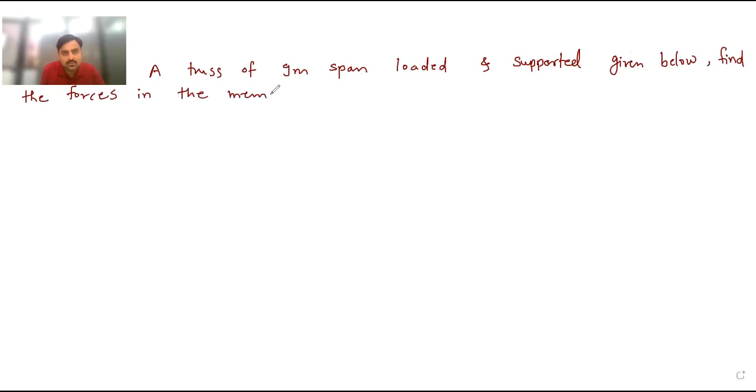Okay, so now moving further we will take the next numerical. So the next problem is a truss of 9-meter span, loaded and supported as given below. Find the forces in the members CD, DG and GH.

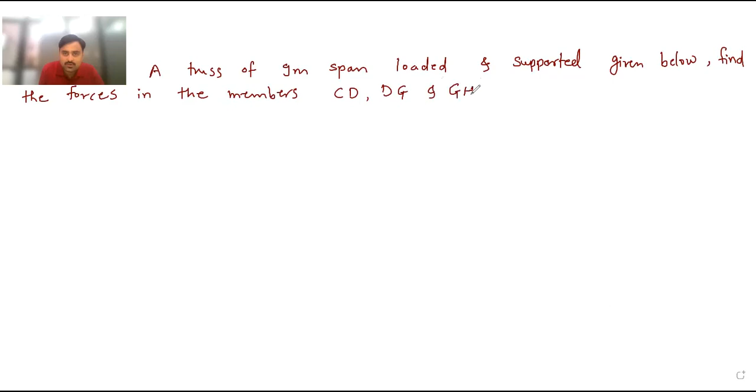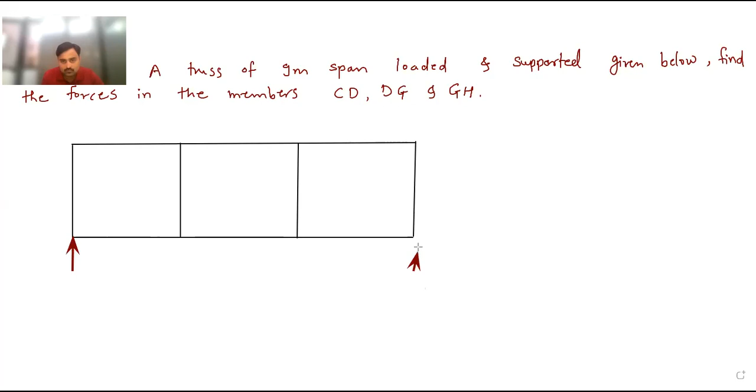Okay, so I will draw the diagram now. This type of truss is given: 1, 2, 3. Okay. So this type of truss is given and it is a simply supported truss. So I will show here the simple support. The truss is simply supported. So only the simple supports are given over here.

Now, the length is given. Okay, so forces are acting on the truss. Those forces are 9 kilonewton over here. Here at this point, a force of 9 kilonewton is acting. Here a force of 12 kilonewton is acting at this point. Then, okay, only two forces are there. So here it is the 9 kilonewton and here it is 12 kilonewton.

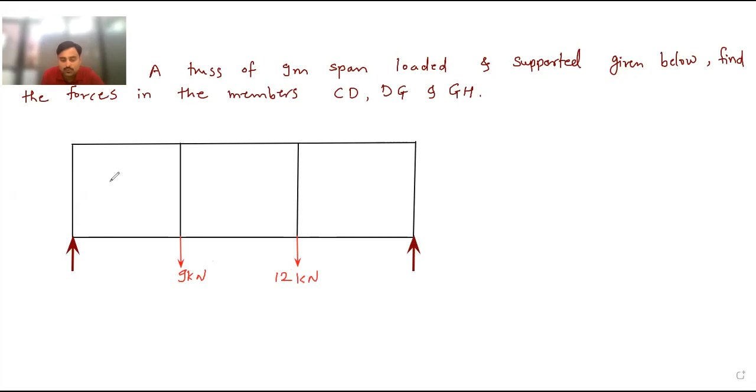Now we will give the names to the members. So this is our point A, here it is point B, then this is point C, D, E, F, then this is G, and this is H. Okay. More members are there. We will draw those members. So DG is one of the members. Sorry, CG. Then this is member DH.

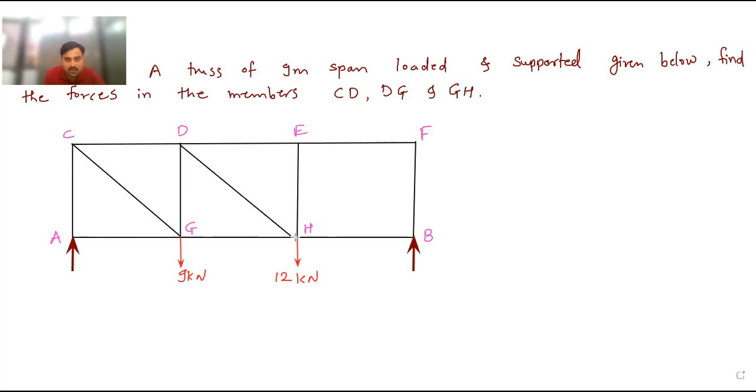This is member DH. Then EFH, so this is one member FH. Okay, so this is the given geometry. Now the distances are given; I will mark those. So this is 3 meter span. From this point also it is 3 meter, and further it is also 3 meter. So 3 meter, 3 meter, 3 meter.

So I will write here. This is 3 meter, this is also 3 meter, this is also 3 meter. And height is also known to us. Height is given as 4 meter. So from point A to point C, this height is given to us as 4 meter. Okay, so this is 4 meter. Now this is the given problem.

What have they asked us? They have asked us to find out the forces in member CD. So see where is CD located? This is member CD. Then DH, okay, sorry, DG. So this is member DG. And GH, so GH is this member. So they have asked us the force in CD, DG, and GH.

Now we can solve this problem by method of joints and method of sections also. In this numerical, they have not specifically mentioned whether to solve it by method of joints or by method of sections. So you are free to use any method. But my advice: if in the examination they don't tell you which method to use, then always go for the method of sections because it is easier.

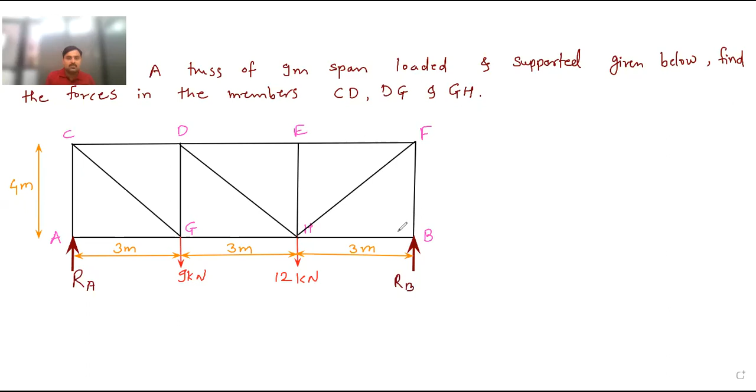So now we will first of all find out the reactions. Take the moment of all the forces about A equal to 0. Summation M about A equal to 0. Clockwise moments are positive, anti-clockwise moments are negative. If I take the moment about point A, RA will become 0 because RA passes through point A. Next force is 9 kilonewton, its distance is 3 meter, so its moment will be 9 into 3. It is rotating in clockwise direction, so positive.

Then here it is 12. 12 into what is the distance? 6, 3 plus 3. So again plus 12 into 6. Then lastly RB. RB is 3 plus 3 plus 3, so 9. It is moving upward, so it will rotate in anti-clockwise direction. So it will be minus 9 RB, which is equal to 0. If you solve this, you will get the value of RB. Let me know the answer.

11. Okay. Positive or negative? Positive. So our assumed direction of RB is correct. We have considered RB in upward direction and we have got a positive answer, so our assumed direction is correct. It is upward. So similarly, now find out RA.

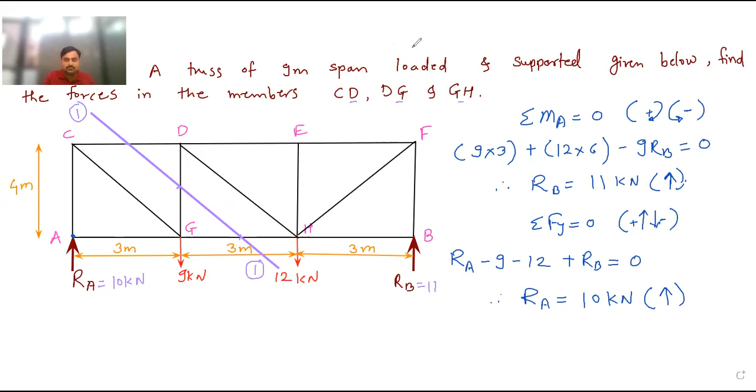Yes, sir. Okay. So now here only I will draw the diagram, side by side, that is why your concept will get clear how to draw the diagram. Now see, we are considering the equilibrium of left hand side. It is in your hand. If you want, you can consider the equilibrium of right hand side also. You will get the same answer. But on the right hand side, this much of diagram is there. Instead of doing that, you go for the left hand side. The smaller part we will like to analyze because we will get the answers more quickly.

So now here I will draw the diagram once again. Okay, so the reaction RA. I am drawing the diagram of left hand side part only. Okay, so this is my point A, this is point C, and this is point G. At G point, there is a point load, and this point load is of 9 kilonewton. At point A, here is the reaction RA. We know the value of RA, it is 10 kilonewton.

Then see now, this member CD is cut by the section. Okay, so if the member is cut, do we know the force in member CD right now? No, so we don't know the force in member CD. So whenever the force is unknown to us in the truss, we always assume that the force is tensile force. So for CD, I will assume that it is tensile force. So I will draw the member CD like this. This is the member CD. Okay, so force in member CD, FCD.

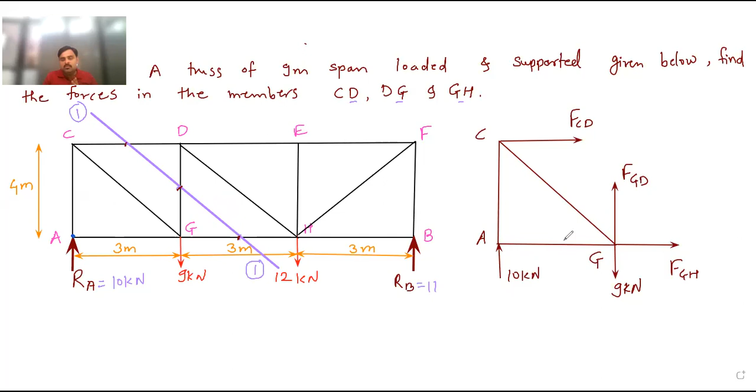See here, a simple thing is there. How to think? माझ्याकडे 3 मेंबर आहेत.

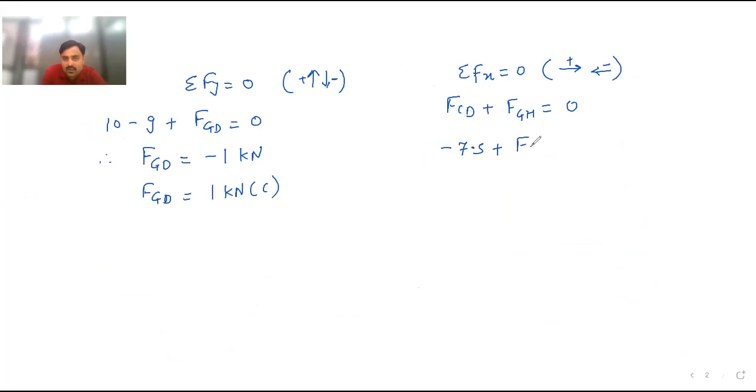So I will write here force in member CD plus force in member GH is equal to 0. But we know the value in member CD. FCD is -7.5. So I will write here -7.5 plus FGH is equal to 0. Therefore, the force in member GH is equal to how much? 7.5 kilonewton, and we got positive answer, so it is tensile. And problem ends over here.

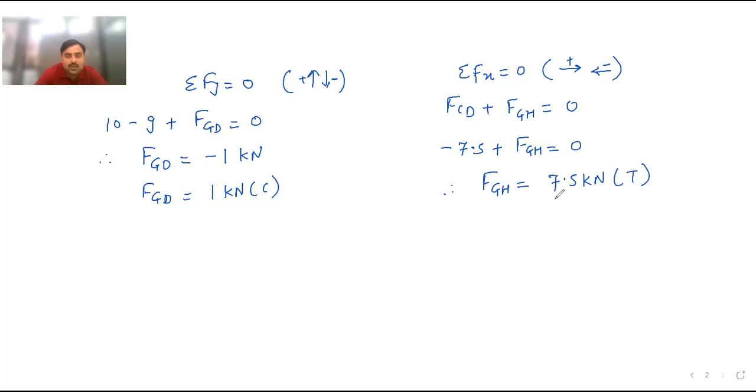Ask me once again. I will tell you once again, but understand the concept. Once you understand the concept, you can solve n number of problems.

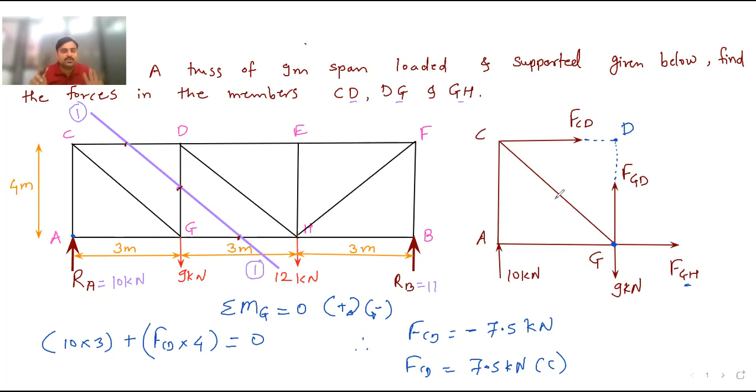So in this way, you can solve the numerical by method of sections. Now, in the same numerical, add this: if I ask you to find out the forces in member EF, FH and BH.

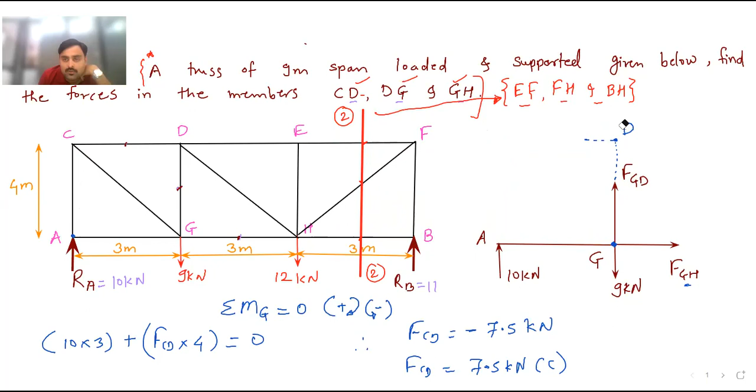So here only I will show it. Okay. So now I will erase this diagram. Now we will consider the right hand side equilibrium of section 2-2. Okay, so now I will draw the right hand side equilibrium. See, this is member BH. This is my point B. This is my point F, sorry, BF. Here is the reaction, RB. The value of RB is 11 kilonewton.

This is reaction RB. Now see, this member FE, EF, it is cut at this point, so we will show this like this. This member FH will cut at this point, so again we will assume it as tensile. Now this member BH will cut at this point, so we will again assume it as tensile. So I will draw these members.

So here, this is the member FE, which is horizontal. This is the member FH, which is like this. And this is the member BH. So this is the force in member FE or EF, force in member FH, force in member BH. So this is our right hand side equilibrium. This is the point H. Now if I show this point H, I can extend this.

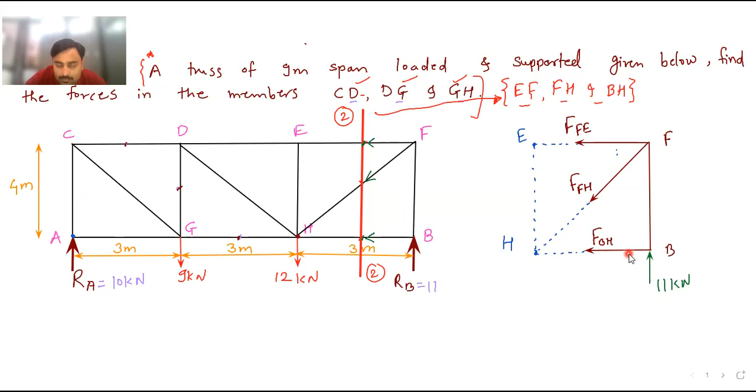Now you can do another way also. You can take the moment at point H and you will get the value of EF.

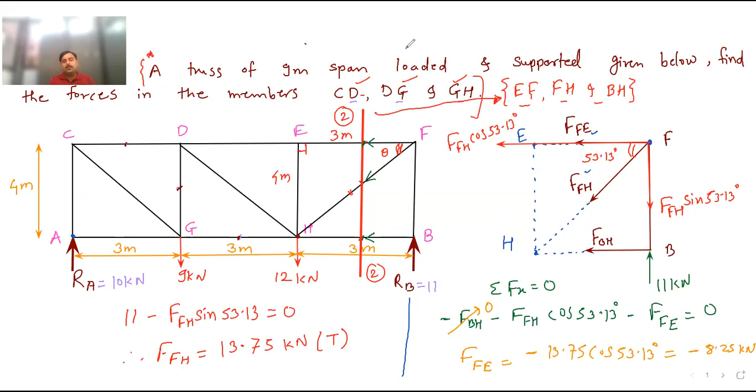And this is minus, म्हणजे खाली तुम्ही लिहा परत FFE 8.25 किलोन्यूटन कॉम्प्रेसिव्ह, मायनस आन्सर आलं. Okay. In this way we need to solve the numerical when there is a method of section.